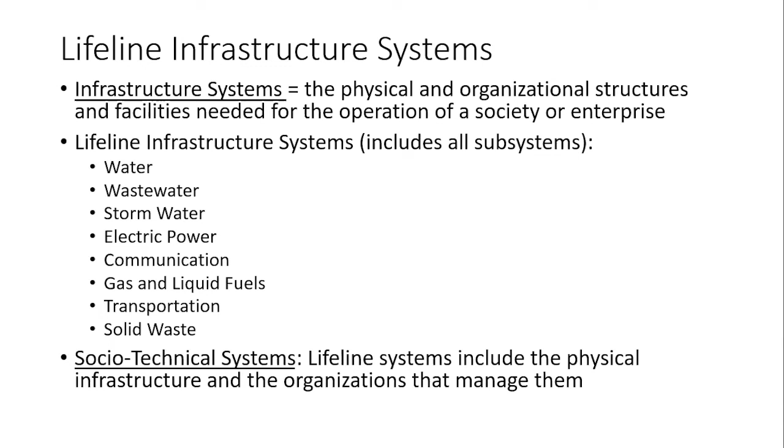Infrastructure systems are the physical and organizational structures and facilities needed for the operation of a society or enterprise. Lifeline infrastructure systems are a subset of the total set of infrastructure systems, and they include water, wastewater, stormwater, electric power, communication, gas and liquid fuels, transportation, and solid waste systems. These are socio-technical systems, meaning that Lifeline systems include the physical infrastructure and organizations that manage them.

Today, I'm going to make a distinction between a system and the network. The systems are as previously defined in the prior slide, meaning they are socio-technical systems and have human technical interaction. The networks in this presentation will be the physical components making up the Lifeline grid used to deliver the services. The discussion is focused mainly on the technical characteristics, considering how they relate with and support the social and organizational aspects of a resilient system. The social and organizational aspects are critical to a resilient system, but not discussed much in this specific presentation.

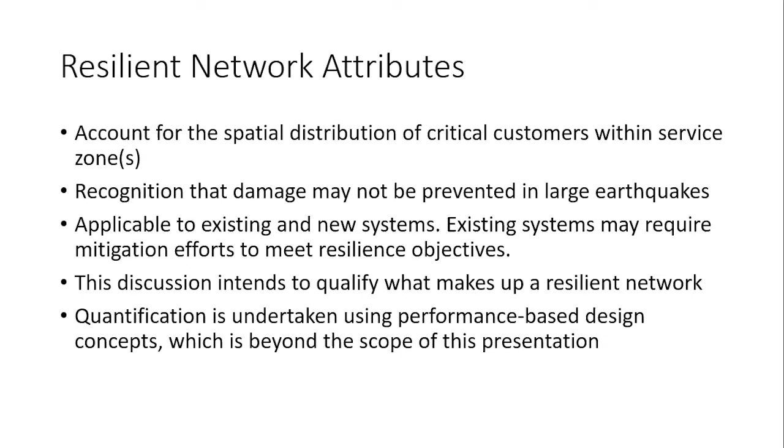This discussion intends to qualify, I emphasize qualify, what makes up a resilient network. The quantification is undertaken using performance-based design concepts, which is beyond the scope of this specific presentation. Let's move into some concepts on operationalizing lifeline resilience. So the attributes previously described are applicable to all lifeline systems. I'm going to give an example of a seismic resilient pipe network as applied to the Los Angeles water system.

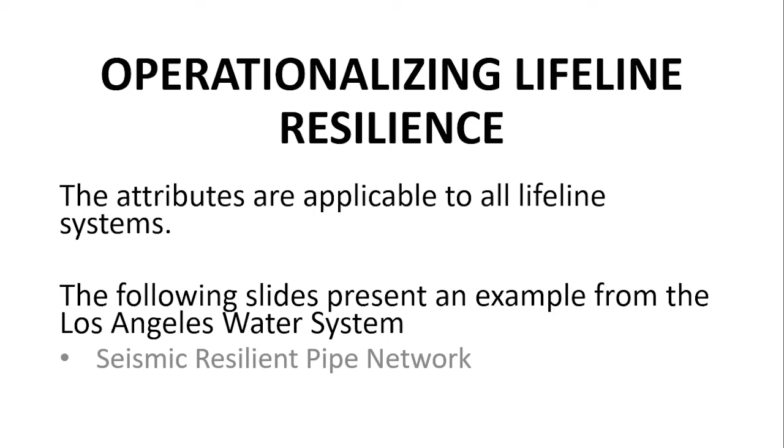The seismic resilient pipe network is a strategy to improve the existing pipeline network. The Los Angeles Department of Water and Power has previously focused on the other components, for example, reservoirs, pumping stations, and treatment facilities, but has not looked at how they all interlink through the pipeline network to provide services to the customers after a major earthquake. So the definition includes all 7,000 miles of pipelines in the LA water system, not just the seismically robust pipes, and how all the pipelines and other components interact to meet performance objectives.

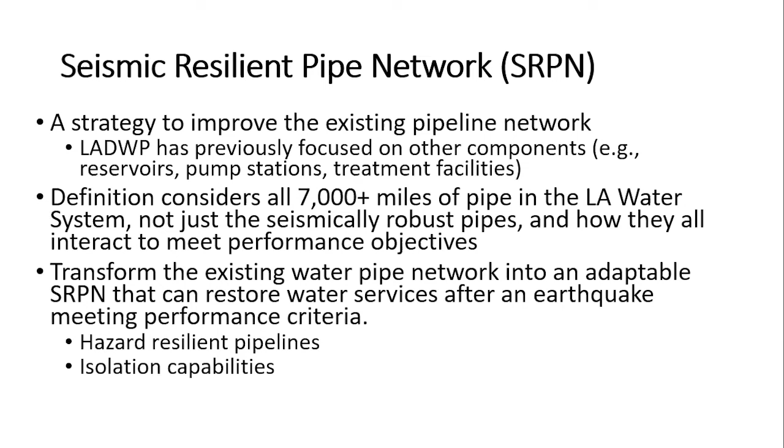They transform the existing water pipe network into an adaptable seismic resilient pipe network that can restore water services after an earthquake, meeting the performance criteria. This requires the involvement of hazard resilient pipelines and isolation capabilities. I'm about to present to you a video that was prepared by the Los Angeles Department of Water and Power that summarizes and overviews the critical aspects of a seismic resilient pipe network as they are applying it.

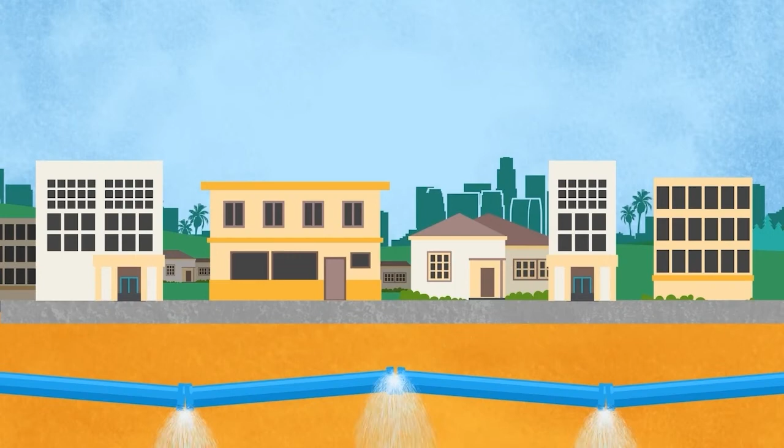At LADWP, we're committed to delivering clean and reliable water to our customers. But what does reliable mean? It doesn't just mean delivering water when it's a nice 72-degree and sunny day. It also means delivering water when conditions aren't ideal, like after an earthquake. In a city as big as Los Angeles, that's no easy task. An earthquake can break some water pipes, therefore interrupting water service. That's why we're working to build a seismic resilient pipe network made up of earthquake-resistant pipes.

Unlike our traditional distribution pipes, whose joints could possibly separate as the earth jolts around them, earthquake-resistant ductile iron pipes are fitted using longer joints that allow the pipe to move without separating. And if the earth moves a lot, the pipe will lock into place and then pull on the next pipe and the next pipe, like a giant chain allowing the pipeline to stretch and continue to be in service.

In order to make our system seismically resilient, our plan for the future is to use these pipes to create a grid across the city, a seismic backbone. This will not only help provide even more reliable water for firefighting, this network will allow us to run lines to critical emergency services like hospitals, firefighters, and other first responders, so that even if other pipes break within the grid, we'll still be able to get water to the places that need it to serve the community during a natural disaster. These efforts are tied to the city's resiliency plans for lifeline systems and are being designed and executed in the most cost-effective way possible.

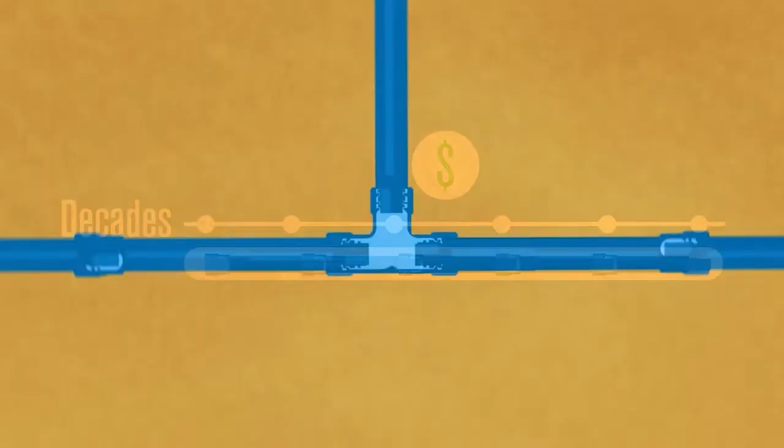The whole backbone will not be put in place at once. Rather, we'll map out the grid and install an earthquake-resilient pipe when the original pipe has reached the end of its usable life and needs to be replaced. This will allow us to create a resilient system over decades while still keeping costs down, ensuring that when a big one occurs, we'll have our services available to help those that need help right away, and also that we'll be able to get our city back on its feet and back to normal as soon as possible.

To learn more, visit www.ladwp.com.

For the transmission subsystem, you need to link critical supply lines from the water and treatment sources to each pressure zone. For the distribution subsystem, there needs to be a layout of an arterial subgrid for distribution pipes in each pressure zone. From that arterial subgrid, we need to connect important water system links and the critical A and critical B customers. So critical A customers are defined as those essential for public health and safety. An example is a hospital. Critical B customers are defined as those important for community resilience, for example, a school.

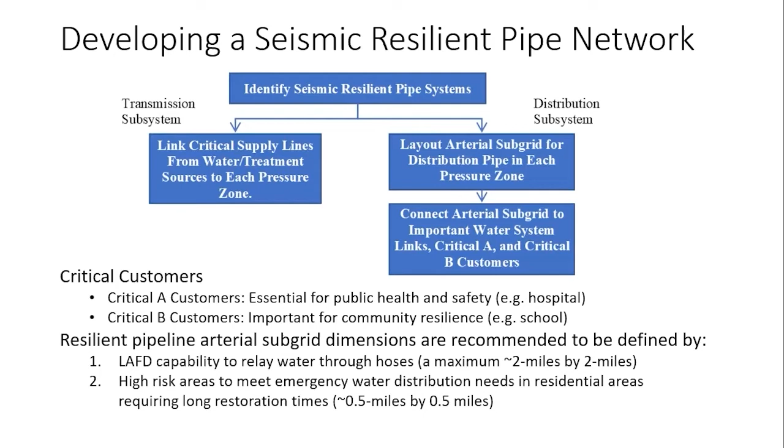The resilient pipeline arterial subgrid dimensions are recommended to be defined by the fire department's capability to relay water through hoses. So, for example, the LA Fire Department can move water a maximum of about 1 mile, which means that we can lay out the grid at a maximum of about 2 miles by 2 miles. For high-risk areas that need to meet emergency distribution needs in residential areas, we need to limit the grid to a maximum of approximately 1/2 mile by 1/2 mile.

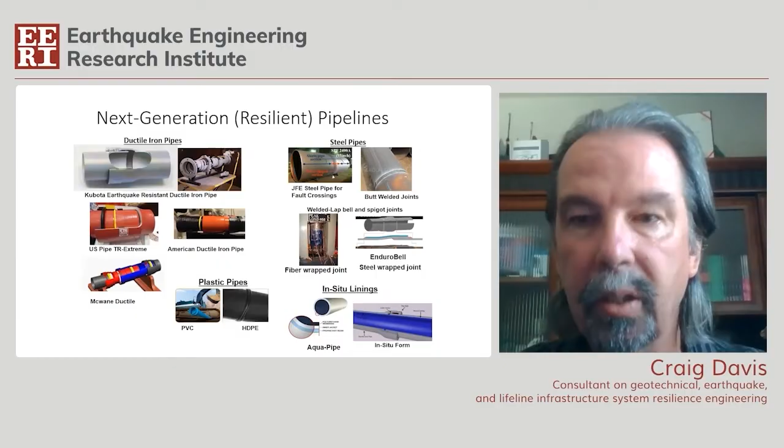This slide shows the next generation of resilient pipelines that have been developed over the past few years, and new concepts continue to be developed. I don't have time to go over these in great detail. In the video, you heard the LA Department of Water and Power refer to earthquake-resistant ductile iron pipes. In that system, they tend to use ductile iron very commonly in the distribution system and steel in the transmission system. You see both ductile iron and steel here, as well as other types of materials, including the plastic types of pipes, elastomeric pipes, and in situ linings. All of these are actually being used in one form or another in the LADWP system and can be utilized in other water systems to create resilient networks as well.

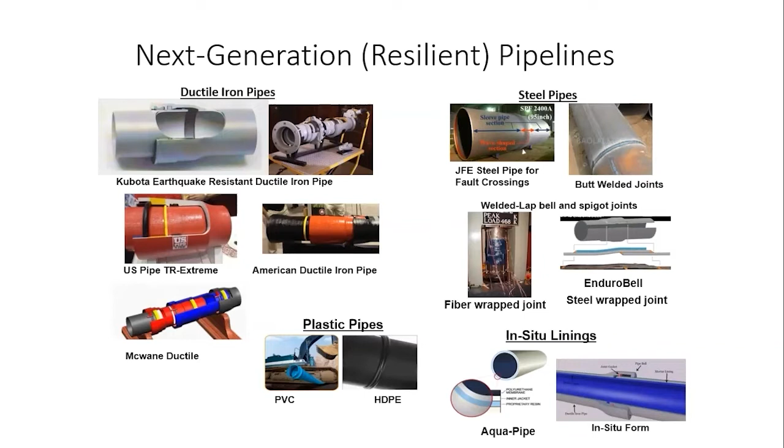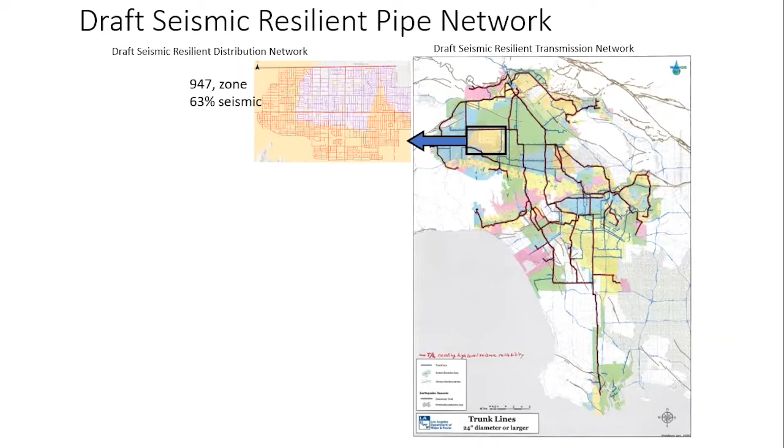We've also taken a look at some example distribution system pressure zones. For example, this one shows the 947-foot pressure zone, and an evaluation using the criteria for seismic resilient pipe network already defined identifies that about 63% of the distribution pipe should be replaced with seismic resilient pipe. In the 579 zone, about 40% of the distribution pipe should be seismic resilient pipe.

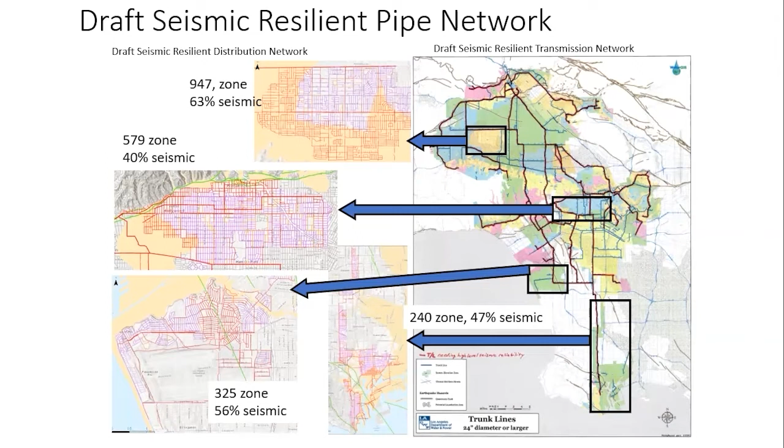In the 325-foot zone, a similar amount, and about 47% in the 240-foot pressure zone. So what we find by looking at these is that we have a range of about 40 to 60% of the distribution pipe, or on average maybe 50% across the city of Los Angeles of the distribution pipe, that should be seismically resilient pipe.

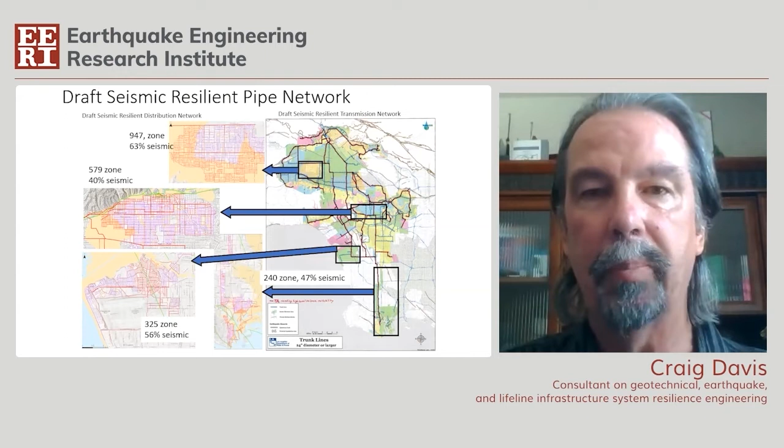These concepts may also apply to other systems, but the issues related to the hazards and what community exists within each pressure zone is important to making a difference in the total number of seismic resilient pipes. But what it does identify is that not all pipes need to be seismically resilient to create a seismic resilient pipe network. Now let's move on to discuss some resilient network applications to other lifelines.

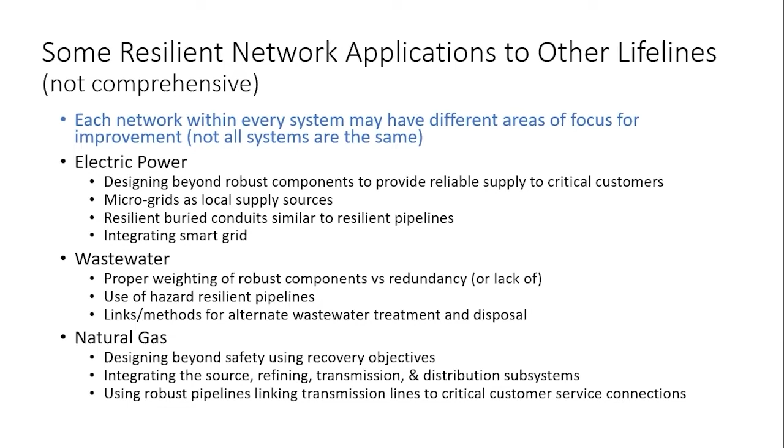Wastewater systems may want to look at proper weighting of robust components versus redundancy, or the lack of redundancy in those systems, the use of hazard resilient pipelines, and links or methods for alternate wastewater treatment and disposal. Natural gas systems may want to look at designing beyond safety using recovery objectives, integrating source, refining, transmission, and distribution subsystems, and using robust pipelines to link the transmission to critical customers' connections in their distribution systems.

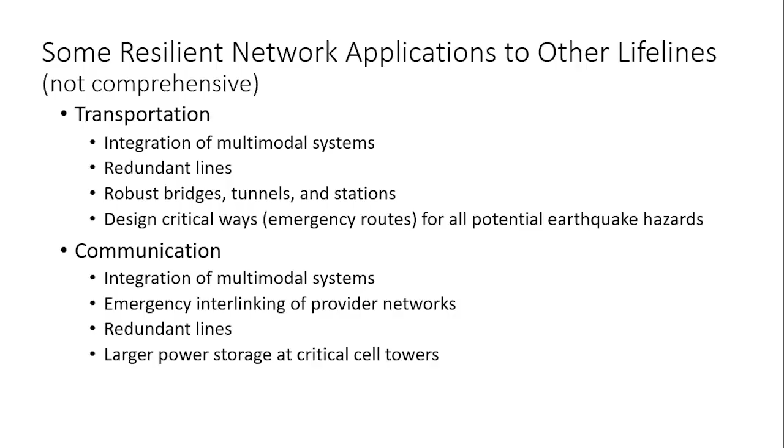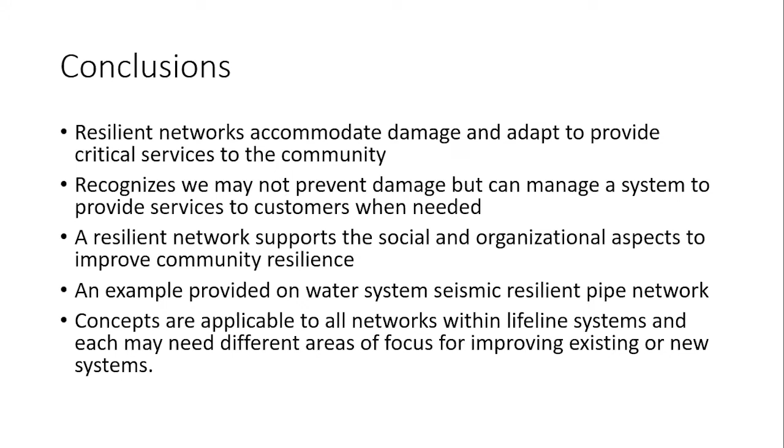So in conclusion, resilient networks accommodate damage and adapt to provide critical services to the community. They recognize that we may not prevent damage, but can manage a system to provide services to customers when needed. A resilient network supports the social and organizational aspects to improve community resilience. An example was provided on the water system seismic resilient pipe network applied to the city of Los Angeles. And the concepts of a resilient network are applicable to all networks within lifeline systems, and each may need different areas of focus for improving existing or new systems.

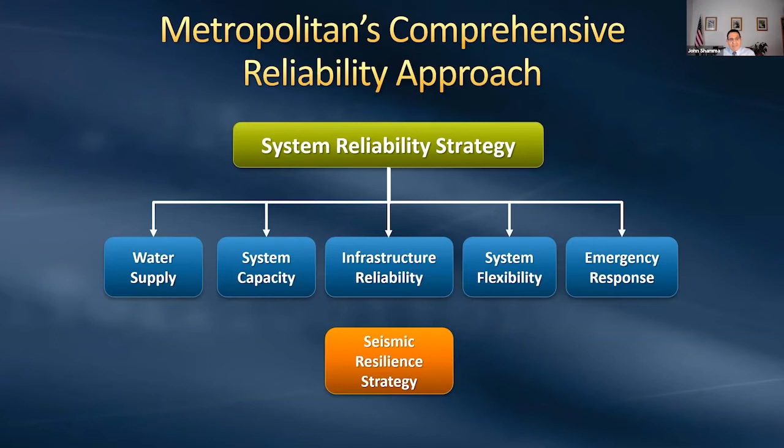We believe by addressing each of the 5 components of reliability, Metropolitan has developed a robust approach to ensuring the overall system reliability for its service area. Included in these components is Metropolitan's commitment to development of projects that are resilient, sustainable, and that can also account for climate change.

The second slide here shows our seismic resilience strategy. Southern California, as everybody in this event knows, is crossed by numerous faults capable of generating large earthquakes. This is a fact that Metropolitan has recognized since its inception. And it is the reason why early Metropolitan engineers included within the design of the Colorado River Aqueduct back in the 1930s measures to mitigate potential damage from fault ruptures at those locations where the aqueduct crosses fault zones such as the San Andreas Fault and the San Jacinto Zone.

Over the years, as understanding of earthquakes and earthquake forces and earthquake design has improved, Metropolitan has continued to adjust and expand its approach to seismic resilience. Today, Metropolitan employs a comprehensive seismic resilience strategy with the goal of limiting the impact of earthquakes when they occur and maintaining water service to our member agencies. Therefore, Metropolitan proactively improved the seismic resilience of its facilities through a multifaceted approach that consists of the 5 components you see on the slide in front of you. Let me go through these components one by one.

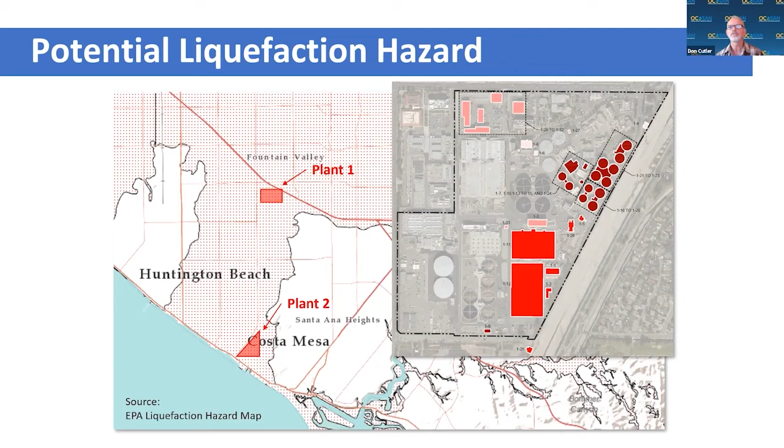And one of the more significant findings is both plants are located on alluvial sandy soils with high groundwater conditions. This is an ideal situation for liquefiable soils to occur. In fact, liquefaction-induced settlement was found in a range between 2 and 10 inches at both of our treatment plants. Next slide, please.

Now, because of this proximity to the Santa Ana River and the fact that we have liquefiable soils at both plants, it was determined that we also have a seismic risk of lateral spread at those facilities. Plant 2 also is challenged with being adjacent to a major fault system, the Newport-Inglewood Fault. And this prompted a new study that is currently being conducted to identify potential fault hazards, as well as the impact from those faults. And that figure to the right shows all of the faults going through our plant.

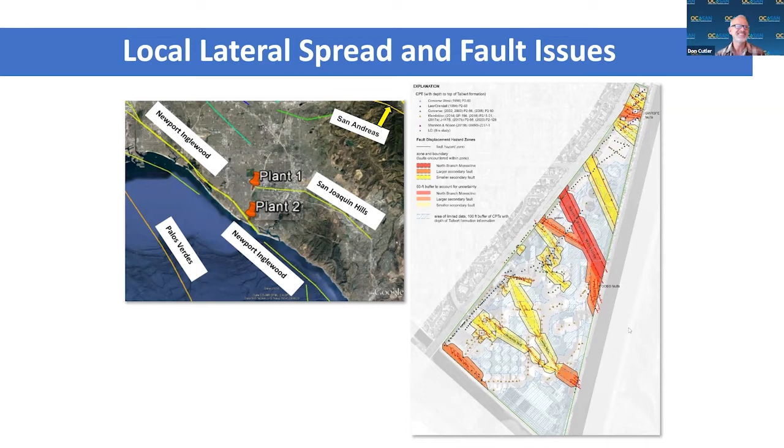That's a wonderful sight, isn't it? Next slide, please.

And as a result of all this work that we've been doing, these seismic studies, as well as other studies that we've been looking at for other risk impacts, we've been able to develop a plan to integrate seismic resilience into our capital program. Several of the process facilities that were identified with risks are already scheduled to be improved as part of our planned capital improvement program. So the seismic rehabilitation will be integrated into those projects.

However, as a result of the work, we did identify 3 structures that need to be replaced in their entirety. That's because the mitigation costs exceed the value of those structures themselves. We also came up with a plan to launch 5 unique projects that will be executed over the next 10 years that are specific to seismic rehabilitation of our facilities.

And as we continue to develop our seismic program within our structures, we will integrate these improvements with other non-seismic risks like flooding and sea level rise that result from climate change. Our ultimate goal here is to develop a robust infrastructure that allows OC San to continue to provide reliable wastewater treatment and service our neighboring communities.

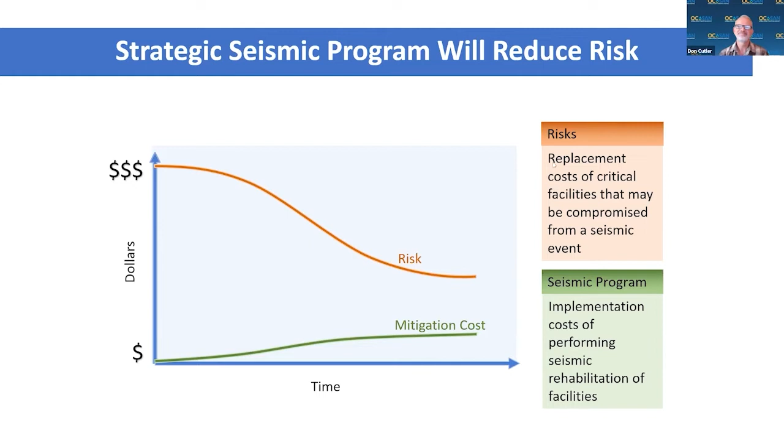We're going to move on to our panelists from Southern California Edison, talking about electricity networks. I'd like to welcome Jennifer Pearce to the panel. Jennifer is currently a principal manager in SCE's, what we call Southern California Edison's, Business Resilience Department, and she's responsible for the company's business continuity, assessment, mitigation, and resiliency planning programs.

Her background is primarily in understanding communities' exposure to the various hazards and threats, and she has extensive experience in catastrophic disaster response planning at both the national and local levels, and also with the private sector. Prior to joining SCE, she actually spent a number of years in Washington, D.C.

At FEMA, we all know, leading the national efforts planning for disaster resilience. And she was also part of the core national team working on the implementation of the President's National Preparedness Goal. So in addition to preparing the organization to deal with disasters, she has worked herself on a number of disasters and reconnaissance efforts, from responding to the 2010 earthquake in Haiti, the Hurricane Sandy in 2012, as well as now more recent events closer to home that include the wildfires, but also COVID-19 response efforts and many more, while executing her duties at SCE. Jennifer, welcome to the panel.